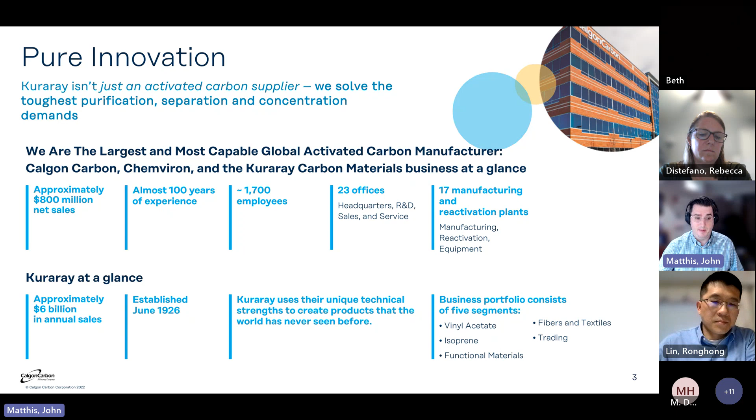We've got over $800 million in net sales annually. We have almost 100 years of experience with activated carbon and activated carbon development, 1,700 employees worldwide, and various manufacturing and reactivation plants throughout the world. Being a part of the Kuraray organization really helps us to further advance the technology and further advance mankind by purifying water and purifying air.

This just gives you some perspective of our footprint. We are headquartered in Pittsburgh, Pennsylvania. That is our global headquarters, but we've got various manufacturing facilities throughout the United States as well as throughout the world.

You'll see when we talk about various types of activated carbon and what makes a good activated carbon for PFAS removal, that it's really a lot of the bituminous coal-based product manufactured here in the United States. We also manufacture various activated carbons in Europe from wood, and in Southeast Asia we also have manufacturing assets for coconut activated carbons.

As it relates to our portfolio, we really focus on activated carbon-based sorbents: coal-based, wood-based, coconut-based. We also have some novel forms of activated carbon, something called carbon cloth, which is used a lot in advanced wound care healing, as well as in CBRN suit protection.

We also have what's called a carbon sheet technology, which is a rather cool product used a lot for fugitive emissions from vehicles, basically adsorbing and desorbing gasoline vapors as it's purged from the tank and in use. And then we also are the world's leading reactivator of activated carbon as well.

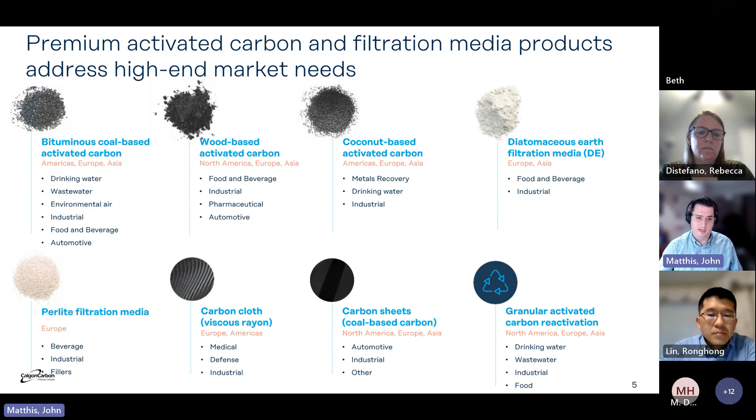So with that, that's enough for the company overview. I'm going to turn it over to Rebecca for some PFAS introductions and a current explanation of some of the best available treatment technologies for them.

Thanks, John, and thanks to everybody for attending this, and I'm happy to be here to speak with everybody about this topic. We're going to go back and forth between the different sections of the talk so that it's not one voice through the whole thing. I'll go through this section and then hand it back to John for another section and continue from there.

So to get into the PFAS topic, PFAS is obviously an acronym. It stands for per and polyfluoroalkyl substances, a class of chemical that's a fluorinated compound, shown here as PFOA and PFOS. You see the black chain is the carbon molecules, and the green molecules attached are the fluorine, with different head groups depending on the compound.

There are so many different permutations of these that have been in development. I think the inception goes back to the 50s, but the branched version, the linear version, all the different head groups, different permutations result in over 4,700 different compounds within this class of chemical. And you may have heard, years ago, PFCs. So all PFAS are PFCs, but not all PFCs are PFAS, is the way to think about it, because we do want to see a mostly saturated compound with fluorine.

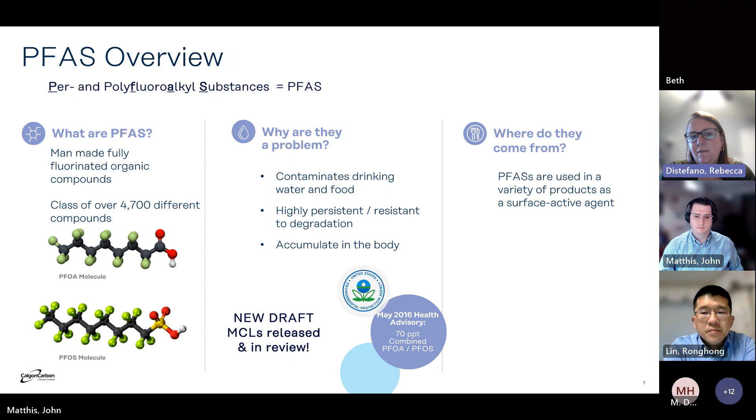Unfortunately, again, they don't break down, so that allowed them to run off at different points and then eventually be contaminating groundwater.

So the next slide will show a little bit of a close-up on the PFOA and PFOS molecules. You see the carbon chains and then the fluorine atoms bound on that chain, fully saturating it. PFOA is perfluorooctanoic acid with the carboxylic acid head. PFOS is perfluorooctane sulfonic acid with a sulfonic head group. Different head groups just impart different properties, and they're used for different applications within those types of products.

This chain and this structure results in a higher molecular weight and a very low vapor pressure. This allows it to easily infiltrate into the groundwater through the soil and migrate in plumes. It also allows them to be very adsorbable into organisms. And because of the saturated structure, with all the fluorine on there, and because that chemical bond is so strong, it makes them very resistant to oxidation, biodegradation - typical other types of technology used that would break down other compounds is not successful in breaking these down.

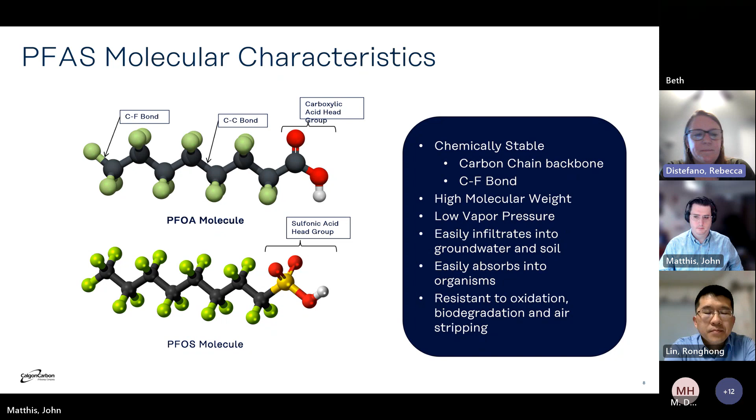So now that we know they're highly prevalent, there have been developing lists of toxicity data, and because they're persistent and bioaccumulative, in 2016 the EPA had set health advisory limits for PFOA and PFOS, and the limit was a combined, both of those compounds combined to be less than 70 parts per trillion, so 70 nanograms per liter. Thinking about that scale, if you don't typically work in the nanogram per liter range, it's jarring how low that number actually is and how small the safe amount of PFAS actually is.

Those initial HALs were in review for a long time, and a lot of states actually set lower limits and single-digit advisories or MCLs state by state. This has since evolved to now draft MCLs that would be a nationally enforceable standard for drinking water. So there are primary standards for many different compounds and chemicals. This would add PFAS to the list.

What actually just came out recently was the list seen below, where PFOA and PFOS are given individual MCL limits of 4 parts per trillion. Then 4 other PFAS compounds are grouped together and evaluated as a hazard index, and the EPA provides the formula for calculating this number. The idea is to keep the overall general concentration of these, based on an index, below a unitless number of 1. Since these are out, there's a 3-year review period where there's a lot of different testing. We'll see how many and where - we know it's very prevalent. I think this is going to tell us just how exceptionally prevalent it is.

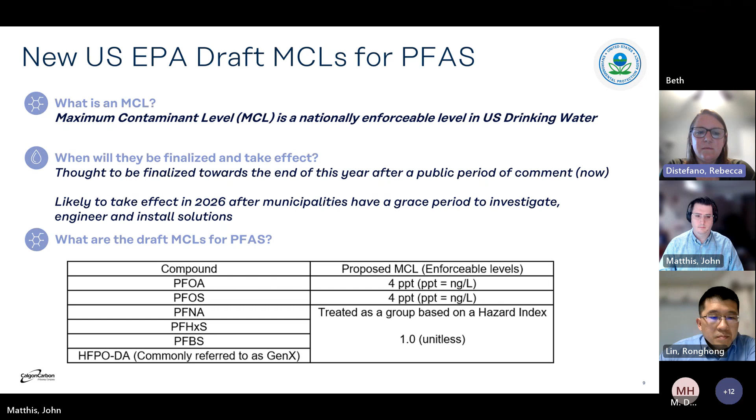So we've talked about how it's out there, it's persistent. The EPA has deemed it concerning and given it potential MCLs. So what can we actually do about it? We have a few options. Obviously our favorite is granular activated carbon, but we do provide anion exchange resin as well. Another option for treatment is high pressure membranes, similar to an RO membrane. There are pros and cons to each of those technologies that we'll discuss here.

Obviously, activated carbon and anion exchange are adsorptive, where they're removing PFAS from the environment and binding it onto the actual adsorbent. RO membranes are processing through and then have PFAS in their rejection water, so they're transferring them from a dilute state to a concentrated state that can then be disposed of. But that is one of the cons - you need to dispose of that highly concentrated PFAS.

In general, when comparing the technologies, it's easiest to compare granular activated carbon and anion exchange resin because they're both adsorptive. So what's really different about them? Typically carbon has lower capital and O&M costs. It's definitely been in use longer for PFAS, and there's probably a lot more information on it, although anion exchange is also pretty well established at this point, and there's a lot of data and information out there on that as well. Depending on the concentration in the compound and everything else, anion exchange resin may be more economical.

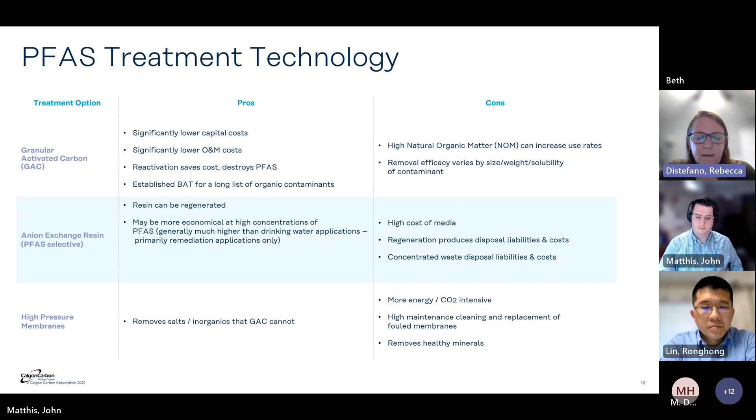So specifically with PFAS removal, what do all of them have in common? What are the differences between them? Again, because we're trying to target these nanogram per liter, very low level treatment objectives for the application.

So again, GAC is the most studied technology, and with enough carbon, we can remove 100% of the contaminants. Given those very, very low levels, and the MCLs at 4 parts per trillion or index levels very low, that's where we want to be, and it has a very good capacity for some PFAS. In addition, it's going to help you overall treat your water.

Granular activated carbon's been used for years and years for taste and odor, disinfection byproduct removal, dechlorination. So there are other applications that go along with it as you're getting PFAS removal. A lot of people that have carbon online are seeing they don't have PFAS because the carbon's taking care of that as well as the application it was intended for.

Resin is similar, and in addition, they could have a smaller footprint and the beds are smaller. RO membranes, high pressure membranes, have a very good rejection rate for PFAS. Again, the main point there is the high energy input to actually operate them. They're operationally more complex than just a flow-through adsorption system, and there's the reject that you have to deal with.

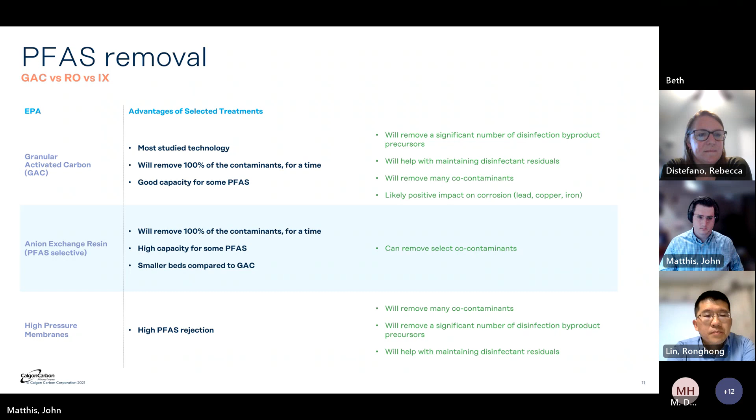Okay, so John will go through some of our activated carbon fundamentals.

Thanks, Rebecca. So as we talked about, to understand how activated carbon is effective for PFAS, I just want to give some background on how it's used, what it's made from, and show some of the data we have as it relates to removal for PFAS.

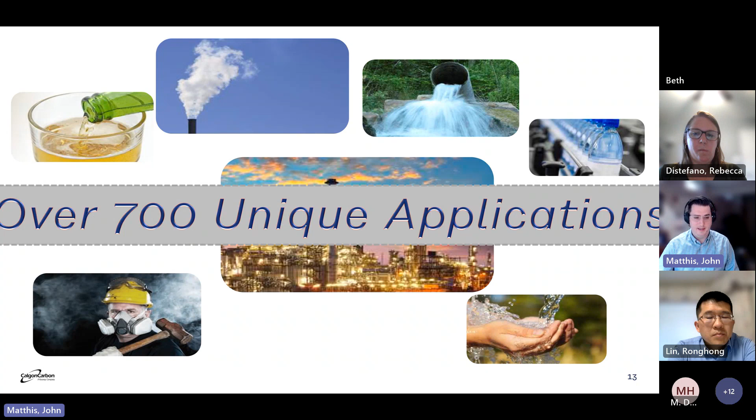So as Rebecca mentioned, activated carbon's got over 700 different unique applications. When you wake up in the morning and drink your first cup of coffee or glass of water, that's something that's likely been purified with activated carbon. It's similarly used to purify CO2, or used in a lot of the home air filters implemented at your house or at your workplace. So it's a rather ubiquitous media because of how broad and cost effective it is in removing contaminants.

When we talk about activated carbon, it's important to call out that this is primarily graphite—activated carbon is about 99% graphite. What makes it a little bit different than graphite you might think of, like pencil lead, is that it's a really crude, amorphous form of graphite. When we think of pencil lead or pencil graphite, it's a bunch of platelets that are kind of uniform and slide on top of each other.

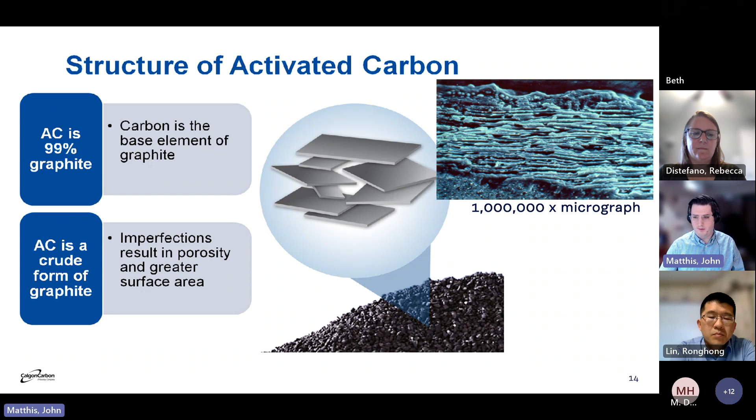Activated carbon looks a little bit like a deck of playing cards that's been used by the kids, or used for over 20 years. It's kind of expanded—there's tears in the deck of cards, parts of it that are folded over, and because of that, it makes it even more porous and have a very, very high surface area, which is critical for how it's effective.

When we talk about the forces that remove all of these contaminants, activated carbon works through a process known as adsorption. Adsorption is something that's often confused with absorption—one, because they sound alike, and two, without a technical understanding, you're basically removing something from something else. So it is a similar mechanism, but there are some very key differences.

Whenever we talk about adsorption, we're basically adhering something to the surface of an adsorbent or media, so there's not a subsequent swelling. The only thing you will notice is whenever you measure the media before and after, there will be an increase in weight. For instance, whenever we put activated carbon into service for water treatment, whenever you take it out, it's going to be approximately double the weight just because it's got a bunch of water and whatever contaminants it was removing from the stream as well.

This is in contrast to an absorptive process, which is really similar to kind of like a sponge. Whenever you put it in, it's going to soak up contaminants and water, but there's going to be a subsequent swelling of that media as well. So not only will it weigh more, you'll be increasing in volume as well.

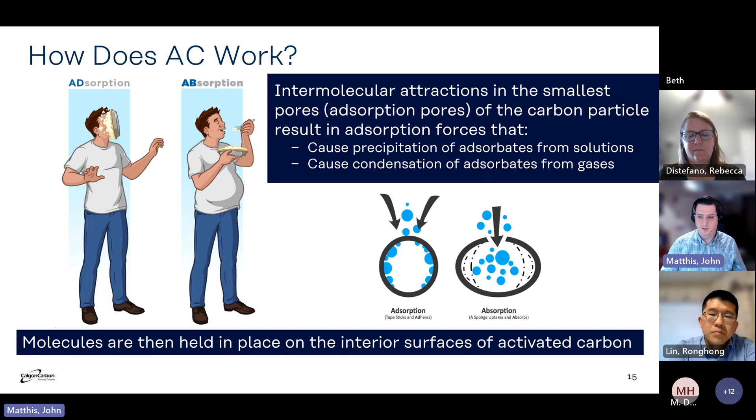So that's just kind of a classic example trying to explain the differences between those two processes. But the key takeaway is because it's an adsorptive media, activated carbon is essentially pulling molecules or contaminants out of solution in air and holding it very, very tightly to the surface area of the material.

It's important to recognize whenever we talk about surface area, it's kind of mind-blowing to think about how much surface area we're actually talking about. It's not uncommon for a gram of activated carbon to have about 1,000 meters squared of surface area. If you put about 5 grams of activated carbon in your hand, that's the equivalent surface area of an entire football field. If you want to think of that field being folded up many, many times until it ultimately fits in a few granules of activated carbon in your hand, that's the amount of surface area we're talking about with this media. Just an absolutely mind-blowing amount.

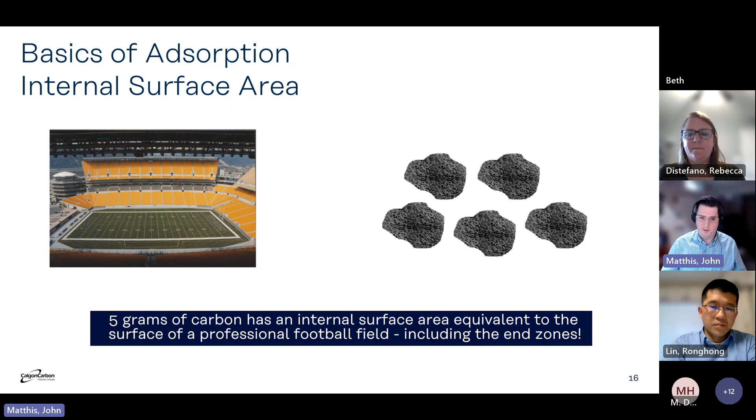And that's important because that's basically where the contaminants are being held. So the higher the surface area, with the right pore structure and performance, generally the better removal you'll get of various contaminants.

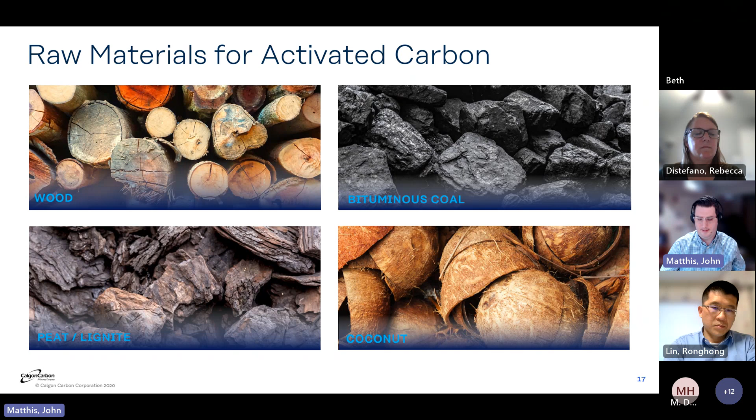So whenever we talk about activated carbon, and I mentioned some of the raw materials in different parts of the world where it's made, it's important to call out there's essentially 4 main raw materials used to make activated carbon. That's wood, bituminous coal, peat or lignite, which is basically lower, or basically lower ranks of coal, closer to the surface, and then coconut as well. This is essentially the coconut shell part - not the meat that you would typically buy in a store, it's the shell part, the brown shell part that typically you'd discard. So these are really the four main sources or raw materials for activated carbon to date.

And why that gets to be really important - it may seem to an untrained eye like it might not matter, but there's really a lot of nuances and a lot of final product characteristics that are inherent in the raw material that is selected. Ash is one component, and ash is basically inorganic material that's present in all activated carbon. That's basically from the source of the raw material that's used, which is why we're very selective in the coals or the wood sources that are used for activated carbon manufacturing.

Transport pore structure and adsorption kinetics is something that is critical to the raw material selection, which we've got some slides later on explaining exactly what that means. Hardness and abrasion is something that's linked to the raw material - how effective the material is in resisting attrition. You don't want particles rubbing together and essentially breaking down. You want something that's very durable, that can withstand some of the service load you would put onto it. So that's linked to the raw materials, which is why these are often used. When we talk about water treatment, really the bituminous coal and the coconut activated carbons are most commonly used in certainly the United States and Europe as well.

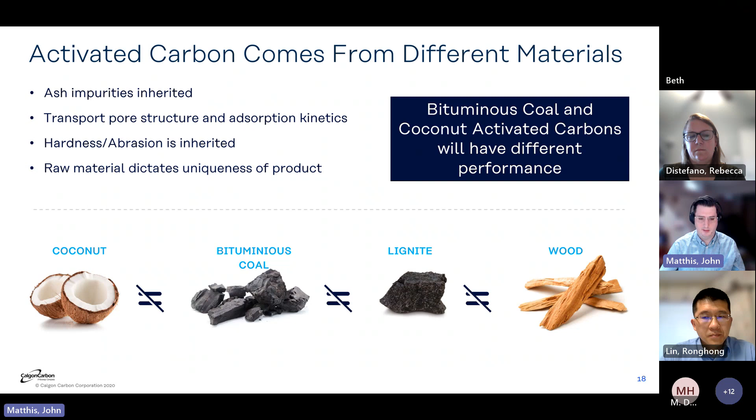When we talk about the pore structure or the differences between the products, this is what we're talking about on kind of a microscopic level. On a macroscopic level, it's all going to look sort of similar - it's black granules. But if you were to look at it at 1,000 times magnification, there's some really unique differences between the products that show up in its ultimate performance.

Whenever we talk about a wood-based activated carbon, you'll see these black lines here are those graphitic platelets we talked about earlier. These little black lines you see broken off here are dislocations, or just small graphitic platelets breaking off from the larger platelet itself. You'll see the wood activated carbon's platelets are spaced really far apart - you've got a fair amount of distance between them, which causes it to have what we call a macroporous structure. So when the contaminant's coming through or being treated with activated carbon, it's got to migrate through this pore structure and then it's held on this surface area here.

So this macroscopic, or really big, pore structure is really useful for things like color body removal, which is why wood activated carbons are used predominantly in the wine and food and beverage industry, where decolorization is very common. But where it really struggles is if you're trying to remove small things.

Small contaminants essentially require a really high pull or a really high force to hold it to those graphitic platelets. Peat and lignite is very similar to the wood-based pore structure. It does well in decolorization type applications.

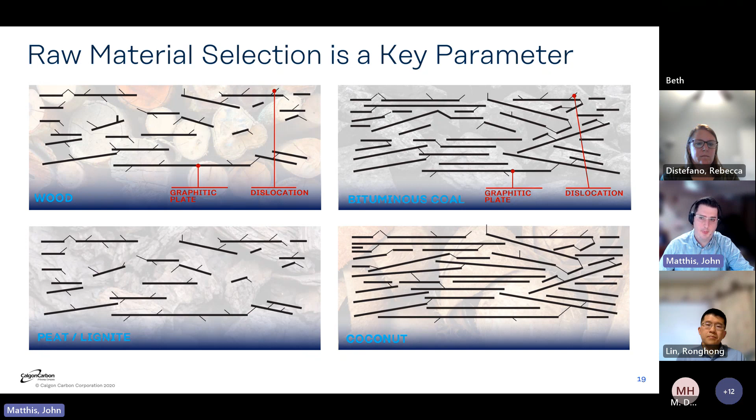Whenever we talk about activated carbon, you may have an interest in how it's made. There's actually a Modern Marvels episode on YouTube for those of you that are interested.

We go through a process known as reagglomeration, where we essentially take a coal blend of material and pulverize it to about 45 microns in size. In doing that, we then put it through an agglomeration step, which produces a product similar to charcoal briquettes you'd see for your grill. We then crush it again to whatever size product we're looking to make - usually something like a 12 by 40 or 8 by 30 is pretty common in the water treatment industry. We then put it through a baking step, which helps drive off some VOCs from the product, and then put it through a high temperature activation with steam injection and temperatures reaching about 1800 degrees Fahrenheit to increase the surface area of the product, to make that football-field-size area in 5 grams.

This can be in contrast to other methods, which is called direct activation. They start off with a single raw material - they don't go through the pulverization or agglomeration step. They immediately go to crushing, and then the process is pretty similar - it goes through the same baking, the same activation, and ultimately produces that finished product.

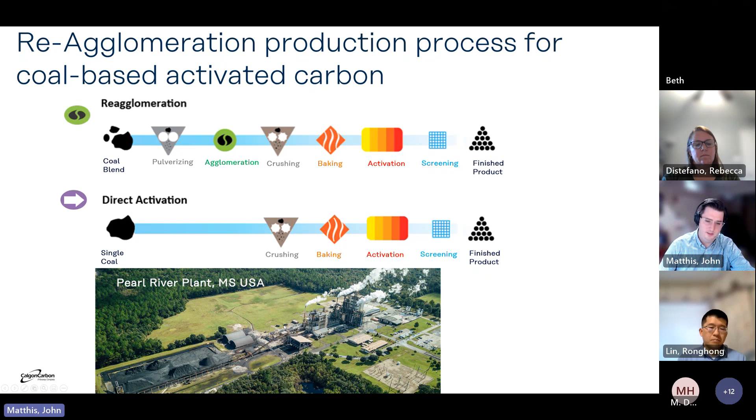You'll see here basically a picture of our Pearl River plant, which is located in Mississippi. This is where we manufacture over 100 million pounds of activated carbon every single year - pretty remarkable in terms of volume as well.

To an untrained eye, it may seem counterintuitive - why would you grind it to 45 microns in size just to agglomerate it, just to grind it again? There are some really unique properties that come out of a reagglomerated product that give it strong performance in this PFAS application and others as well.

What you'll see on the left-hand side is a depiction of a direct activated particle. You can see it's very hard to activate all the way through, because you don't go through this reagglomeration step where you're taking that 45 micron powder, pushing it back together and reagglomerating it. It's very difficult for the steam and that surface area causing reactions to penetrate all the way through that particle. So you get what they call a clinker - something with a low activation center and an over-activated exterior. This is in contrast to that reagglomerated particle, which is very evenly activated, which helps give it great resistance to breaking down, great attrition resistance, but also gives it really tailored performance for pore structures that excel for PFAS applications and others.

So if you take nothing else as it relates to the reagglomeration step, just know that it's a critical process in producing a high performing and consistent product for PFAS applications.

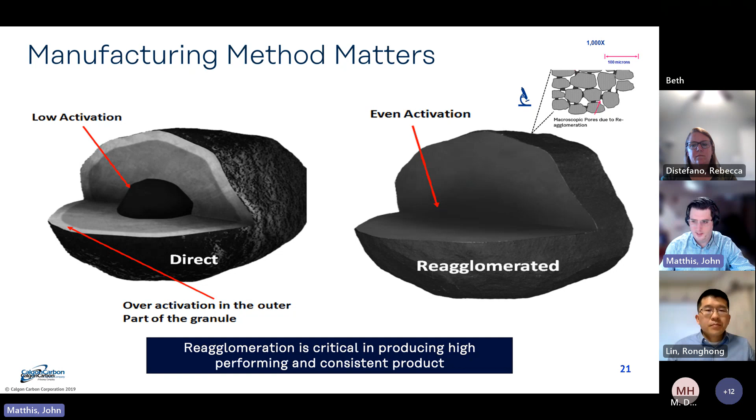Okay, so we talked a little bit about the pore structure, and we talked a little bit about the manufacturing method. I now want to just briefly touch on the mechanism of action for removing contaminants from water, and explain why that manufacturing method matters, why that raw material selection matters.

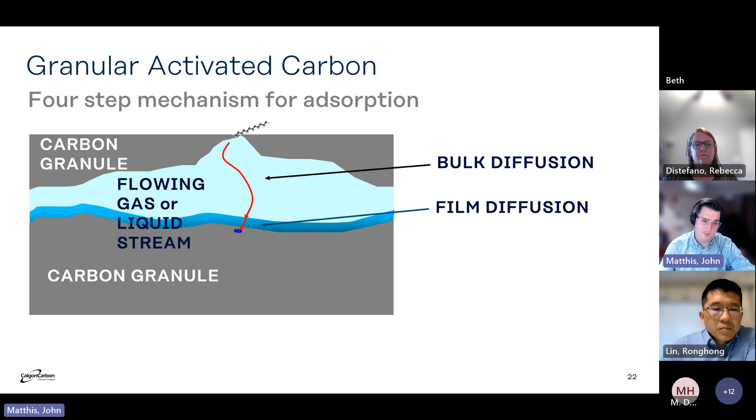So for something to be removed by activated carbon, there's essentially four steps that need to take place. The first is bulk diffusion - that contaminant needs to navigate through that bulk carrier, whether it's gas or liquid stream, to get to the carbon granule. Once it gets there, a film forms on the outside, as one would expect in most pipe flow applications, and the contaminant has to navigate through that film.

It then goes through a process known as pore diffusion, navigating within that internal porosity of the carbon granule, and then ultimately coming to adsorption, which is a surface diffusion reaction where that contaminant's being pulled and adhered to the surface of activated carbon.

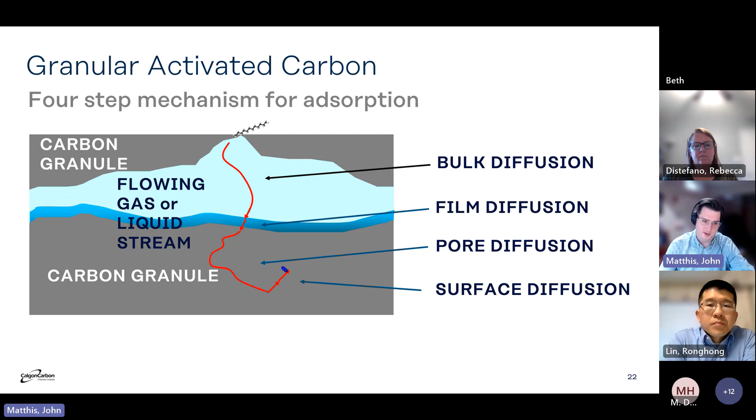I like to think of things a little bit more simply, in terms of an analogy. It's helpful to think of the adsorptive process as kind of like a morning commute - it takes a wide range of roads and a whole process to ultimately get to your final destination. Whenever we talk about reagglomerated coal-based products navigating through a lot of that internal porosity, it's helpful to think of the spaces between these particles as kind of man-made highways, allowing easy and quick access to those carbon granules.

You can then think of the commute between those particles as kind of like a two-lane road - you've got to have pretty equal spacing there. Ultimately the adsorption process is the car pulling into the parking lot. So whenever we talk about reagglomerated bituminous coal, it's got a good blend of these highways, two-lane roads, and parking lots, whereas other raw materials and activated carbon sources are a little bit more specialized. Some have a little more highways, some a little more parking lots, but it's really that balance between the two that creates a high-performing product.

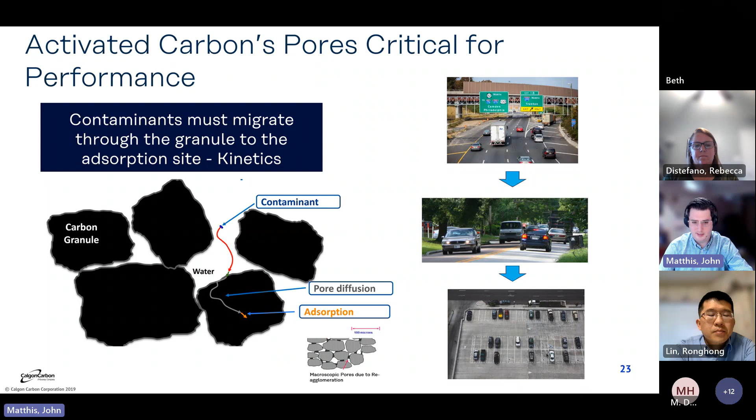Whenever we look at various organic species, activated carbon really likes iodine. It's actually one of the quality parameters we use when comparing activated carbon quality - how much iodine can it adsorb. So if that's on a contaminant, it removes it really, really well.

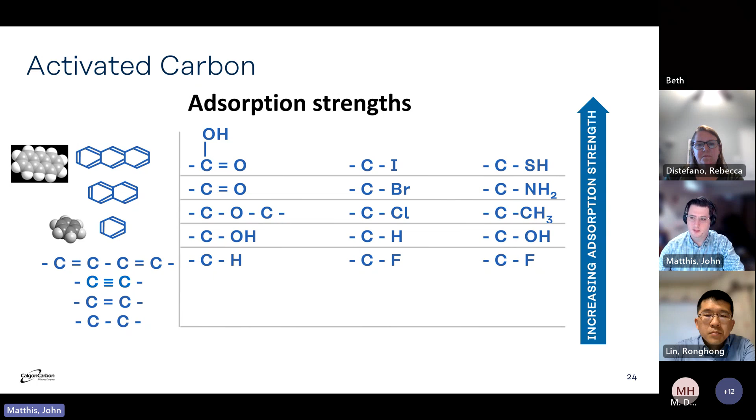Okay Rebecca, you want to cover some of the water and wastewater design considerations? Sure, I want to touch on these with respect to PFAS and how it relates to system design. What are your really critical process parameters when you're thinking about this? Probably because I have a process development background, that's how I think about it - what's a critical parameter, what's a key parameter, what are you trying to do when you're actually running water or vapor through a carbon system, and what's the objective and the best way to optimize and do it?

So the design considerations relate to contact time, your flow rate, and the type of adsorber, the type of system that you're going to use. A lot of these also relate to any adsorptive media, but the numbers may be different depending on the type or the application. But with respect to PFAS, in general, we'd like to see at least 10 minutes of contact time, and depending on how challenging the compound is or the water matrix, up to 60.

That's really a long time to be processing water through a system, because you need to maintain a sufficient flow rate so that you're dispersing through the activated carbon. It's actually an excellent distributor, but you need sufficient velocity so you're not running down the side of a vessel, or over-pressurizing and seeing too high of a pressure drop to process efficiently.

So within the contact time constraints of 10 to 60 minutes, you want to see about 1 to 8 GPM per foot squared of that surface area. Typical systems are designed to treat between 1 and 1,000 gallons per minute. Not in the same system, obviously, those are different types of design, but that's the range of standard equipment available from Calgon and from many other vendors too.

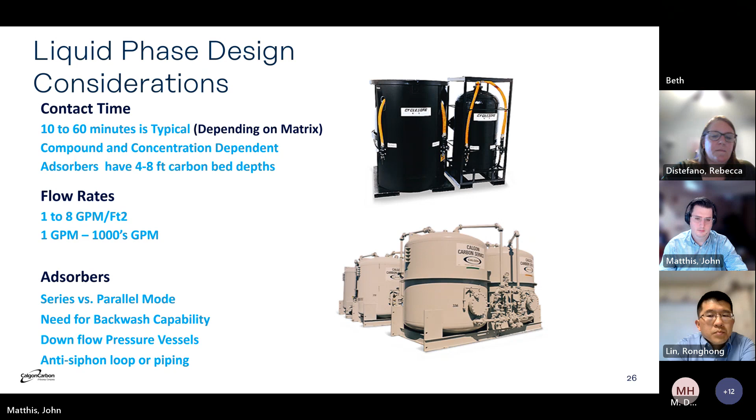So those are kind of our critical parameters. To go into how they're calculated, what they are: empty bed contact time is a term that's thrown around a lot for carbon vessels, and other types of media as well. But it's really the time that the water is in contact with the GAC for a given bed volume.

And it's calculated by looking at your GPM and multiplying by the foot cube per gallon, and then resulting in your foot cube per minute. Then taking your pounds of GAC, your flow rate divided by your pounds, or your pounds divided by your flow rate, gives you your minutes of empty bed contact time.

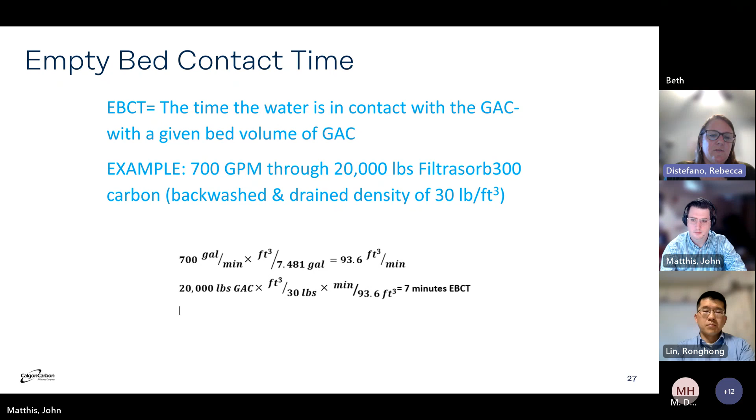There are two different densities to look at. You have your pack density as you fill a vessel, and then also an expanded density after backwashing. Again, we have the targets of between 10 and 60 minutes, depending on water quality. So almost all drinking water systems are on the low end - relatively clean water - and then heavier, higher concentration TOC values in wastewater on the upper end.

Other pre-treatment considerations in the system that can affect operation would be suspended solids. We don't want those solids to enter the GAC if it's not going to be adsorbed onto the GAC or onto the adsorptive media. Then we should exclude it upstream. Otherwise, it's really just blocking those adsorptive sites, blocking up your transport structure.

Granular activated carbon will act as a very good filter down to about 10 to 15 microns, but it's a very expensive way to filter, and you're exhausting your adsorption capacity if you're using it in that manner.

Metals can also be a problem. Metals tend to deposit onto the carbon, again creating that fouling layer and blocking off adsorptive sites. Dissolved solids can kind of cement up the bed, literally turning it into a solid block where you want free-flowing granules.

Oils and grease at too high of a concentration are not adsorbed. Any two-phase system is not applicable for treatment. So if it's at a concentration resulting in that two-phase type system, you'll basically coat the carbon particles and have very inefficient or non-existent adsorption. Biomatter and organisms' biogrowth can also result in fouling. So keeping a very good water flow, excluding these types of contaminants to allow the carbon to do its job, to really focus on those PFAS or hard to treat contaminants, is what we're looking for when we're designing a system.

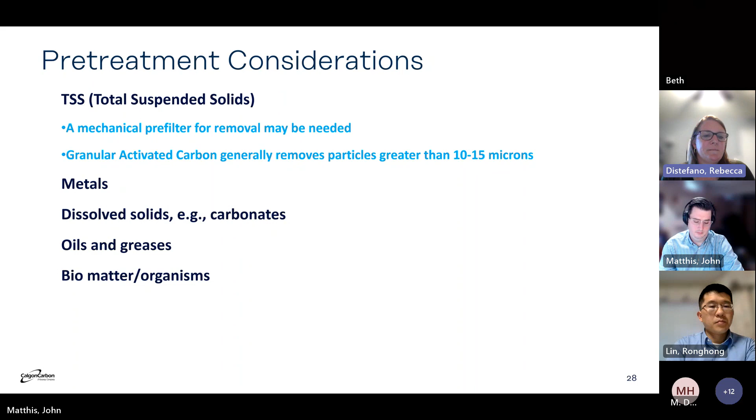So just another slide on startup, because this is very important. We do see things go wrong once in a while if these steps aren't followed in a certain way. Carbon's very forgiving to some extent, but starting up properly can really go a long way to having a long-term, long-running system. We're seeing drinking water systems last for a really long time. We want to keep it that way, and make sure everybody's handling the carbon properly and understanding why these steps are important.

So we want to start with dry carbon, then contacting water. All of that carbon has to deaerate, and all of the air has to come out from even those very fine adsorptive pores. So the initial soak and wetting of the carbon is really critical to allow it to be fully utilized so that the contaminants can enter that very fine pore structure.

So we want to deaerate the bed and then actually backwash the bed, because we're providing a range of particle sizes and mesh sizes, a distribution that has to be segregated so that in subsequent backwashes you have the same segregation within your bed. Those flow rates are determined by the mesh size and the equipment. Understanding these factors going into an operation can really help create a nice long-term treatment for the system.

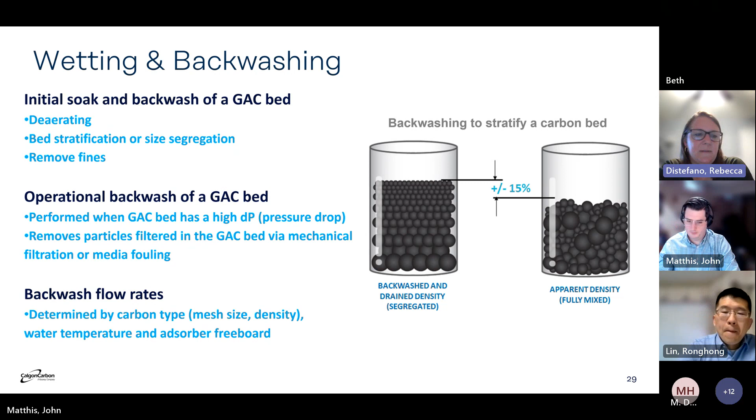Okay, so thanks Rebecca. I'm going to quickly go through some of the data we have on PFAS treatment, just talk a little bit about our experiences. As Rebecca mentioned, PFAS has been removed with activated carbon for a very long time. It's a well-studied media, and its effectiveness is pretty well studied. We've had over 20 plus years in treating PFAS from drinking water and other sources.

We offer basically a range of equipment, activated carbon services, site services to remove the carbon from the vessel, and then a process known as reactivation, where we take the product back, remove the contaminants present on it, and then destroy it in a high temperature process similar to the activation process itself.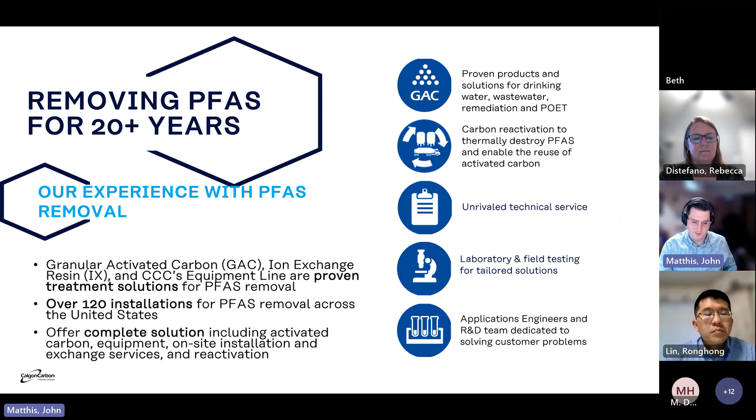We have over 120 installations for PFAS removal across the country, ranging in various sizes. Anywhere from our smaller units to something up to our Model 14, which holds about 60,000 pounds of activated carbon in one of those units alone. So very, very comprehensive as it relates to flow rates and items that we can treat.

Whenever we talk about PFAS treatment, it's important to call out that we do recommend testing. There's a lot of ways to test activated carbons and their ability to remove contaminants. Isotherms typically aren't recommended for PFAS just because of how low the treatment objectives are. It's very difficult to accurately measure how effective the media is or determine change out frequencies based on isotherm testing alone, it's impossible. We do offer bench scale testing, which helps simulate basically years of field service in the lab in a matter of weeks or months, giving real confirmation about change out frequencies, economics, and overall effectiveness for the products. And then piloting systems, another option that can be done, and then ultimately full scale treatment.

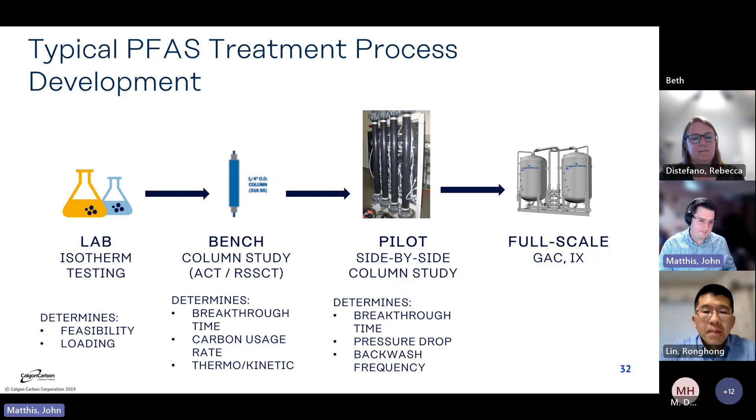We treated it on a Moon Township basically tap water source, so you can see very low TOC levels. We had to spike it for PFAS, which is good news, there wasn't PFAS in the water. So we had to spike it at about 200 parts per trillion, and we used various different PFAS, something from C4 in chain length, PFBA, PFBS, C6s basically with the PFHxA, PFHxS, and then C8, which is the PFOA, PFOS species.

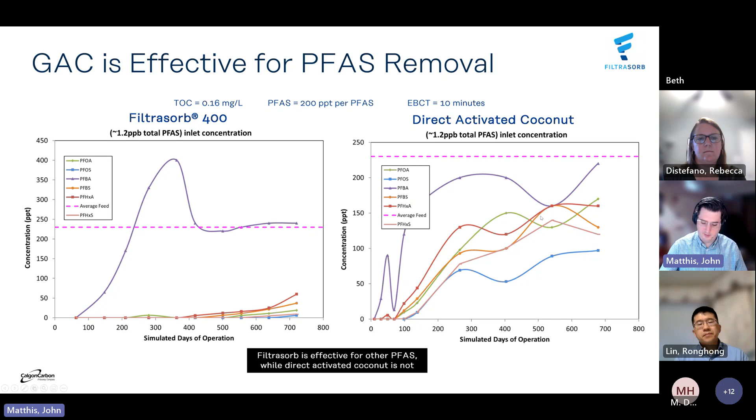So key takeaway from this slide is, activated carbon is effective for a wide range of PFAS. As long as you change out the bed at appropriate intervals, you're able to remove to a very high degree. And not all activated carbons are created equal - you've got to make sure you have the right product for a given application selected.

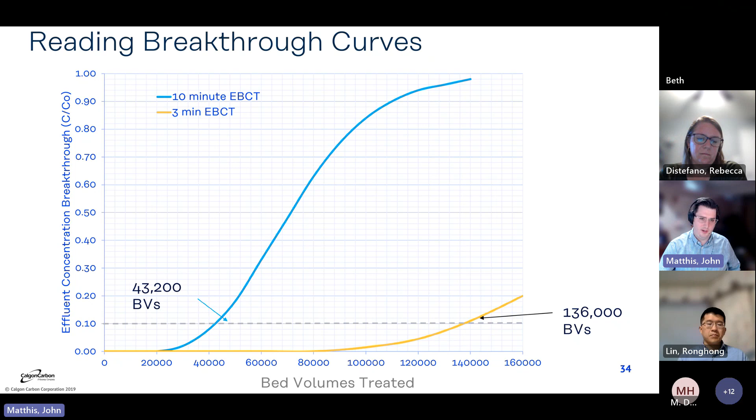Okay, Rebecca, I'll turn it over to you for reactivation.

I think we have a few slides, but I'm going to skip probably more than half of this because we want to get to questions, and we could speak all night about activated carbon and PFAS. So we'll just hit the highlights.

Key takeaway: a thermal reactivation process is not the same as a regeneration process. Reactivation is a high temperature thermal treatment, typically done off-site at a reactivation facility. Regeneration can be performed in process, and typically contaminant remains on the carbon or resin as part of the process, and you're only getting a portion of that bed life back. With reactivation, we're able to fully reactivate the particle to return it to a virgin-like state.

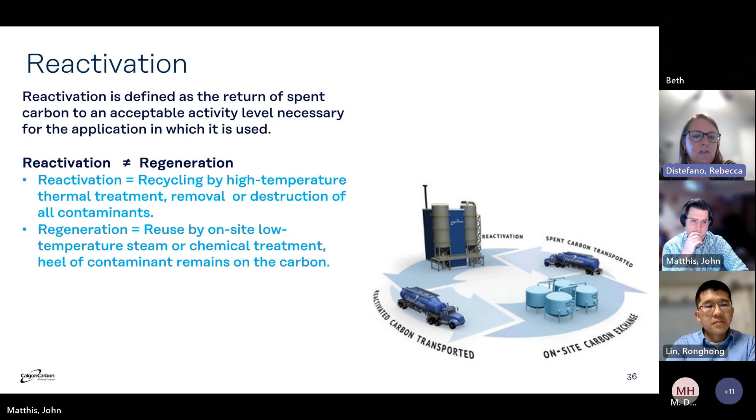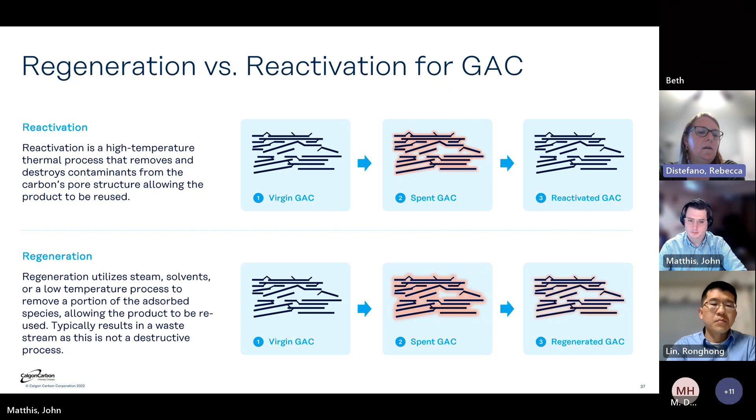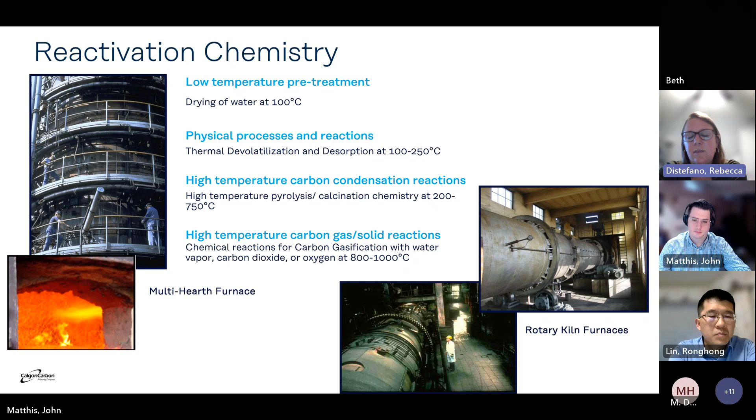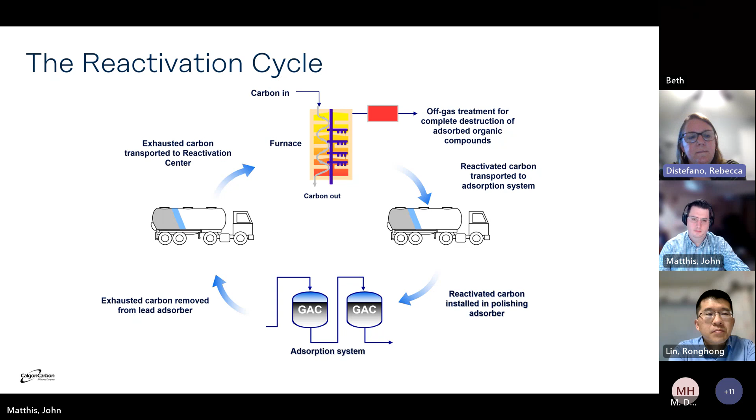This is another pictogram showing carbon entering an adsorptive process, being used, becoming spent, being removed from that system, transferred and then processed through a furnace for reactivation treatment, and then put back into service for another application. There's extensive testing required to make sure you can safely handle and safely reactivate that carbon - it's a big part and a big step of the process. There's a specific department that handles all of these tests and qualification of all the spent media coming back.

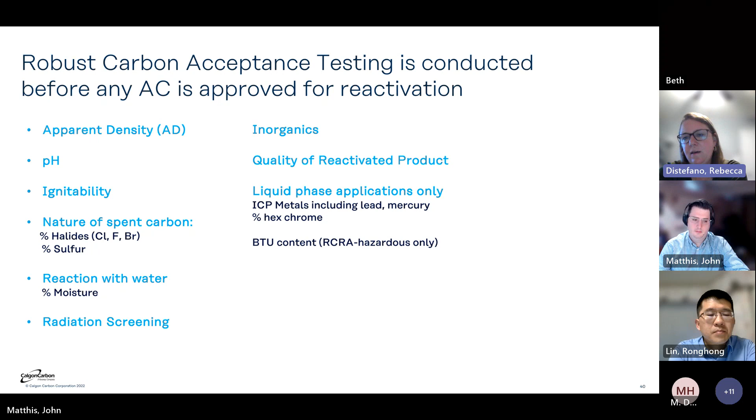With respect to PFAS, it is important not to create a secondary pollution stream. There's a lot of academic literature and research showing PFAS destruction at reactivation temperatures in conjunction with GAC. This is noted here. University of North Dakota has some very good literature out there for reference.

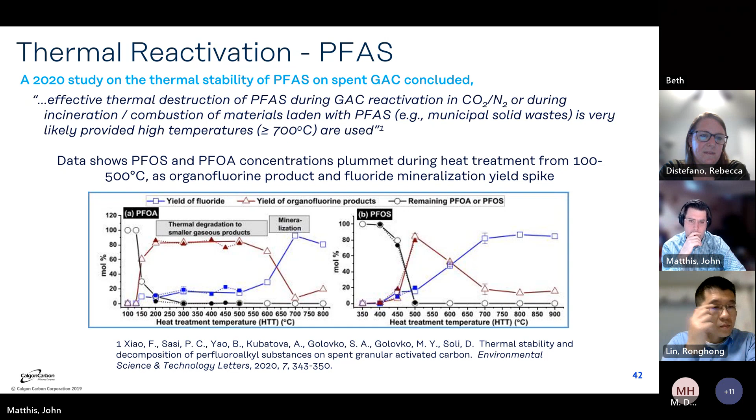We'll highlight our own literature as well. Calgon has a peer-reviewed paper looking at thermal destruction through a full-scale reactivation furnace using a PFAS-laden spent carbon. That was published last September, and it's open access in the Remediation Journal. At a high level, what was demonstrated was greater than 99.99% destruction of targeted PFAS, up to a 35 compound list, and greater than 99.999% of PFOA, PFOS, GenX, and PFBS, which were the current HALs at that time.